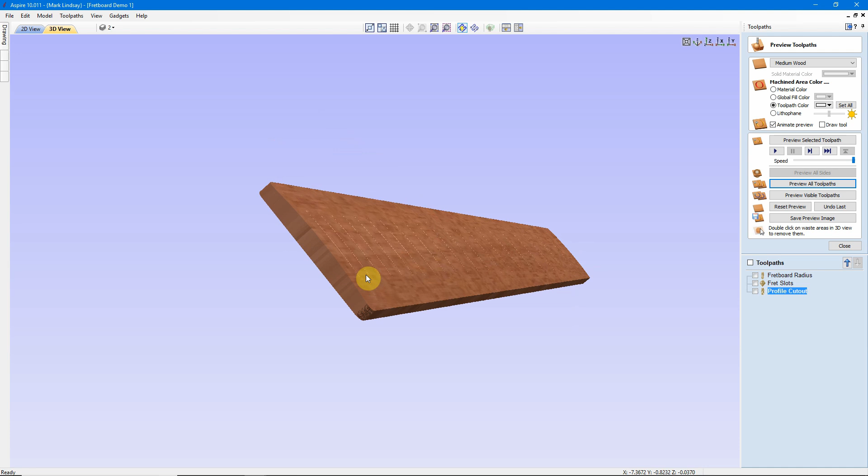Hey y'all! In this video I'm going to introduce the Moulding Toolpath, and I thought a good place to start would be on a simple project like this radiused guitar fretboard. Some of you may be thinking that's not a very simple project, but when it comes to the Moulding Toolpath, creating this radius on the top surface is a very simple project to do.

Now let me preface all of this by saying that I am not a luthier. I'm what you call a hack guitar builder. So if you're interested in lutherie and want to get into serious guitar building, I'll put some links in the description to a couple of message forums that I've found. I would recommend you join those forums, read threads on the guitar builds they're doing over there, and investigate further on your own. I am not an expert at this at all.

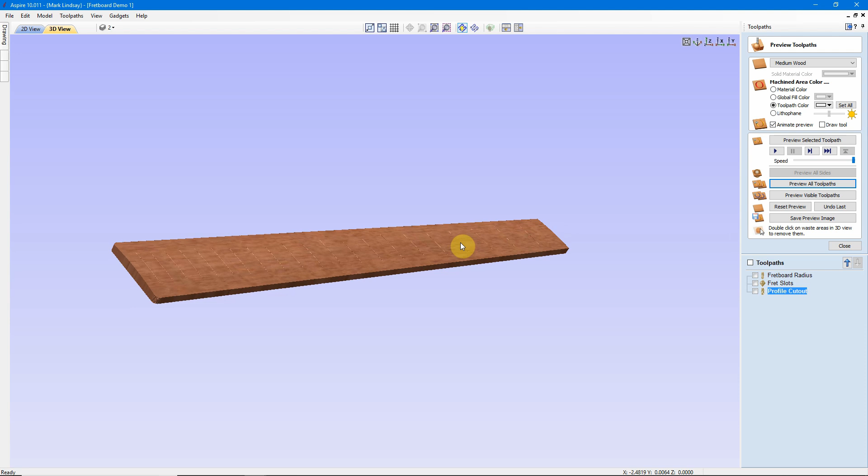Also, let me say that there are many ways of making fretboards. This is not the right way, it's not the wrong way, it's just the way I do it. So, with that in mind, we can go ahead and get going on it.

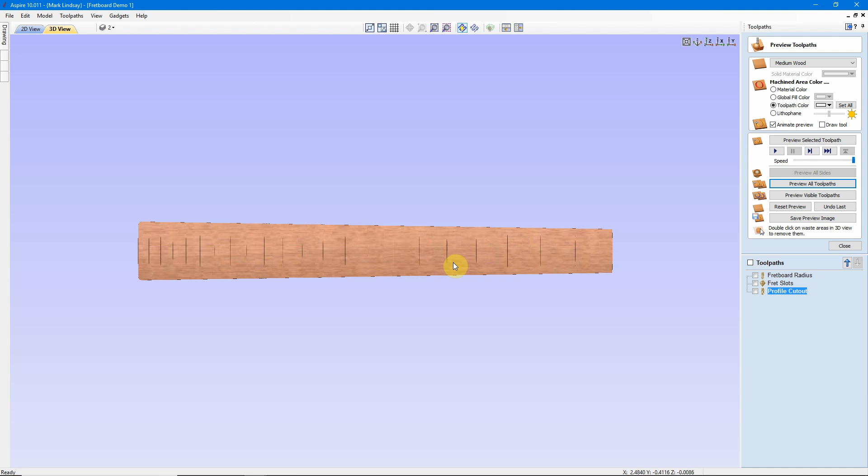Probably the hardest thing to do on any kind of fretboard build is to make the calculations needed to lay out the fret marks. The easiest way I have found is to use a website called FretFind 2D. FretFind 2D does use Flash, and I know a lot of people don't like Flash, but you can use it without Flash. It's just you won't be able to download the vectors we need to do our fretboard.

Without getting super technical into guitars or guitar building, you do need some information to lay out a fretboard. First of all, we're going to be working in inches. The main information you're going to need is your fundamental scale length. The scale length is the distance between the nut up here, where the strings cross over from the headstock and the tuners, from where the string last touches the nut down to where the string first touches the bridge. It's this distance between these two points that makes up your fundamental scale length.

You'll see it's already set for 25 inches. Most electric guitars are somewhere around the 25-inch range. Fender runs 25.5. Gibson, there's some controversy there - they're a shorter scale length. Most people these days, if they're making a Gibson style guitar, it's 24 5/8 of an inch. But most of your Stratocaster clones, etc., are somewhere around a 25-inch scale length. So that's what I'm going to use.

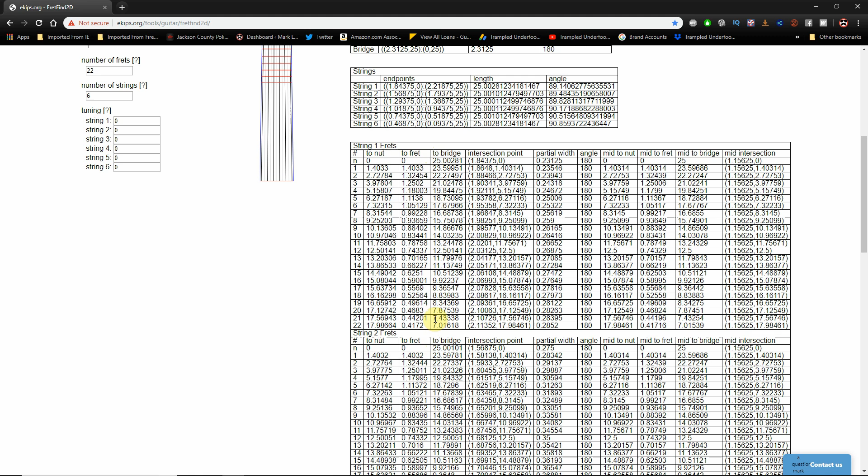Now if you don't activate Flash, you can come down here and take all these measurements and use those to calculate your fret positions. If you do activate Flash, allow, you'll see these buttons appear. Once I have all of my measurements over here, change that back to 22. Once I have all my measurements entered over here and I'm sure everything is correct, I can come right up here to this button. Save DXF file to disk.

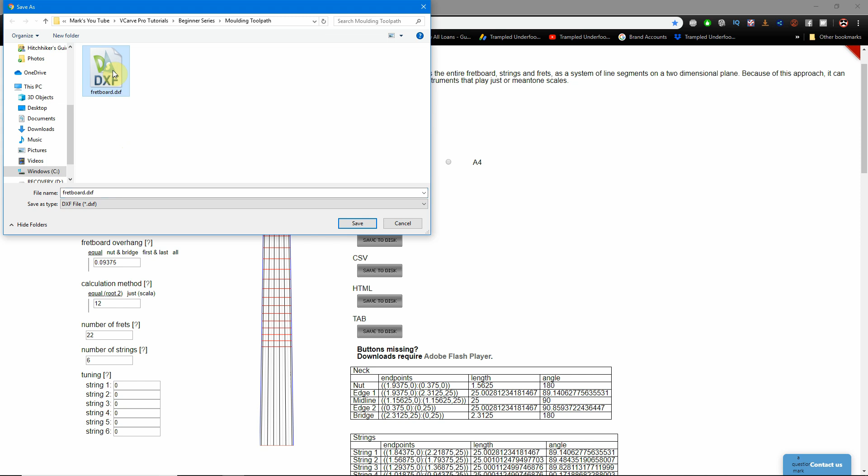And that's what I'm going to do. I'll navigate to the correct folder. I'm going to name it the same thing. I'm going to replace this file. Save. Yes. Now I'm finished with this website.

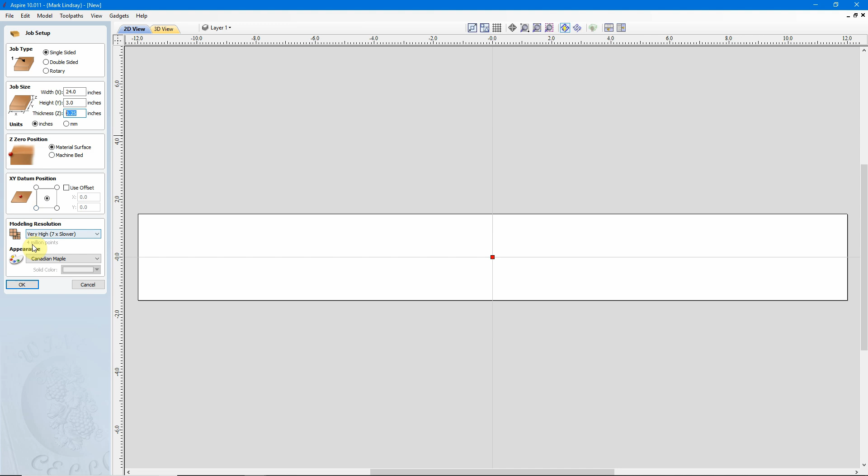So we'll get started with my blank piece of material. I'm going with a 24-inch width in X, a 3-inch height in Y, and my material thickness is 1/4 of an inch. I am using inches. I'm setting my Z0 at the material surface. For layout purposes, I'm going to set my XY datum position to the center. However, I will be changing that over to the bottom left, as that's where I set my XY0 outside on the CNC machine. And we'll go ahead and we'll accept those settings in our job setup.

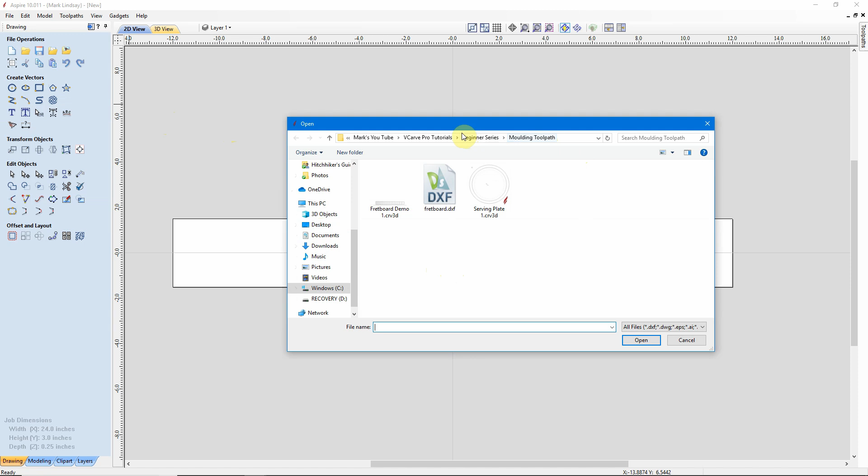Okay, now I'm going to need to import that DXF file. So I'll go up here to File, Import Vectors. Navigate to the folder I want to import from, and here is my fretboard. So I'll select that and open it. And that's the orientation that it saves the fretboard in.

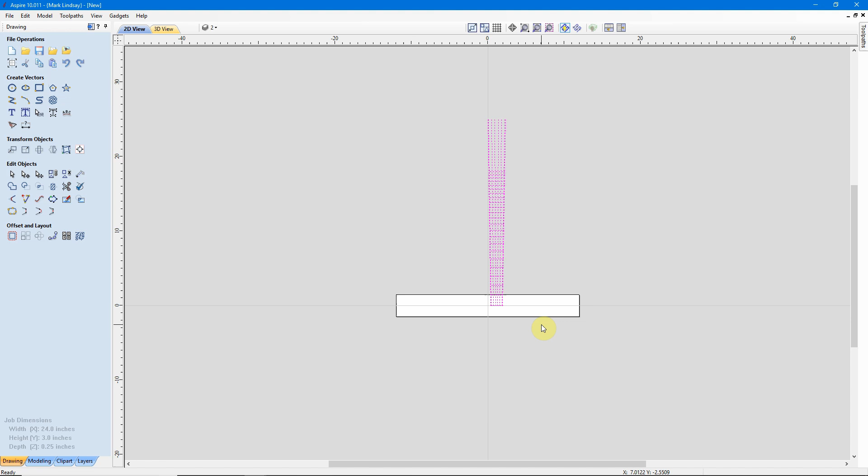So with everything selected already in pink, I'm just going to tap the number 9 on my keyboard. And you see it rotates it 45 degrees. I'll tap it again, and there we have rotated it 90 degrees. I can come over here and align it vertically and horizontally with the center of my material. And that brings it down here where we can see it.

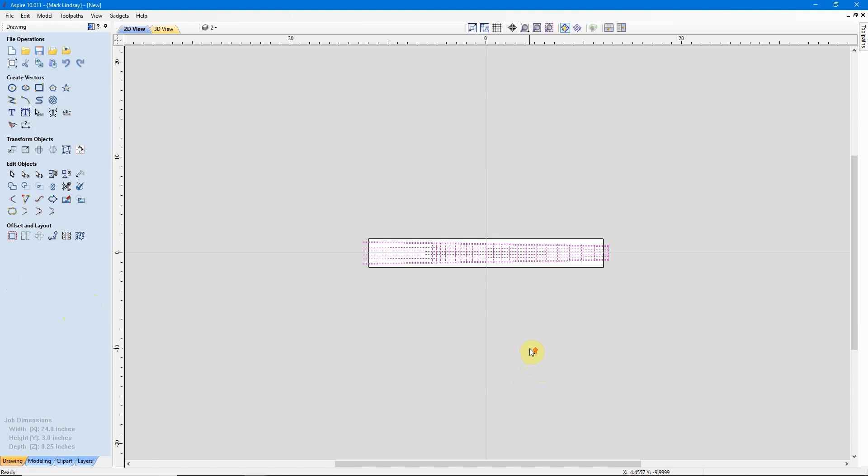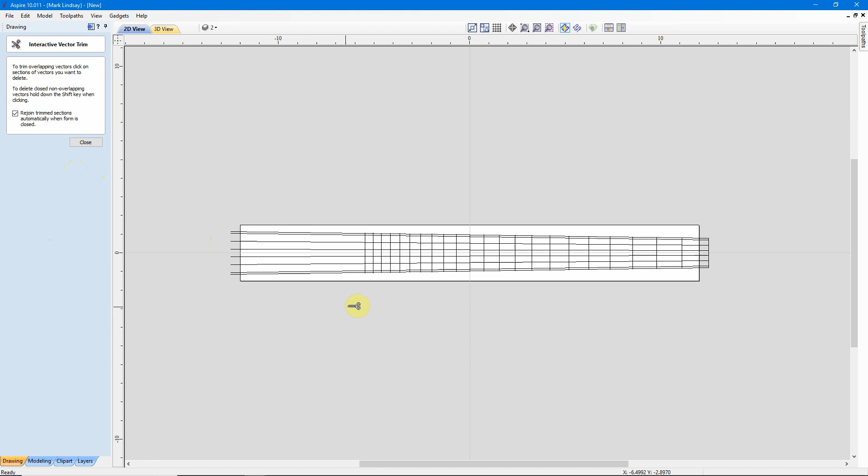Now you can see already that this is way too long. It's about 1 inch longer than the material is. If you remember when we were over in the website, I said that this measurement from this line right here down to the end here is from the nut to the bridge. Well, we're not interested in all of that. We need from the nut to this line right here. So I can click off to deselect, and I can grab my scissors, and I can trim away this outside vector here and this outside vector over here, then close.

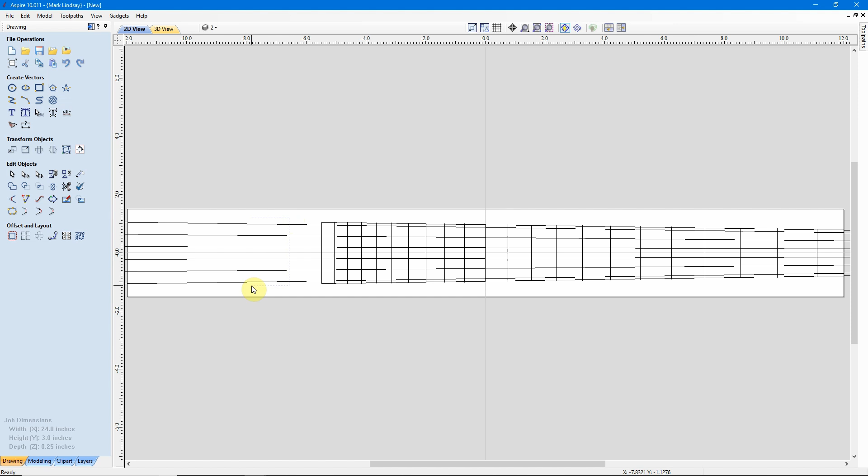Now the rest of these vectors here represent the guitar strings, and I don't need those for this drawing. So I can select all of those and just delete them. Now I have just my fretboard vectors that I'll be using.

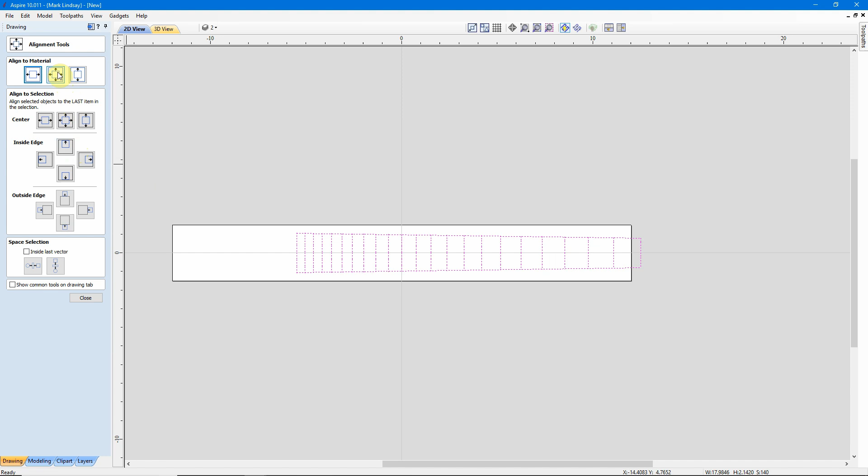So I need to center those on my material. So I'll select them all and align them vertically and horizontally with the center of my material. Then close. Because this was a DXF file, and knowing the way DXF files are created, we know that these are not joined vectors. Also, because of the way that website works, it can make multi-scale fretboards. All of these fret lines are separate segments.

So I will need to join these. So what I'll do is I'll select them all, then holding down Shift, I'll deselect these edges here. Then I want to join all these vectors. So I'll come over here to join.

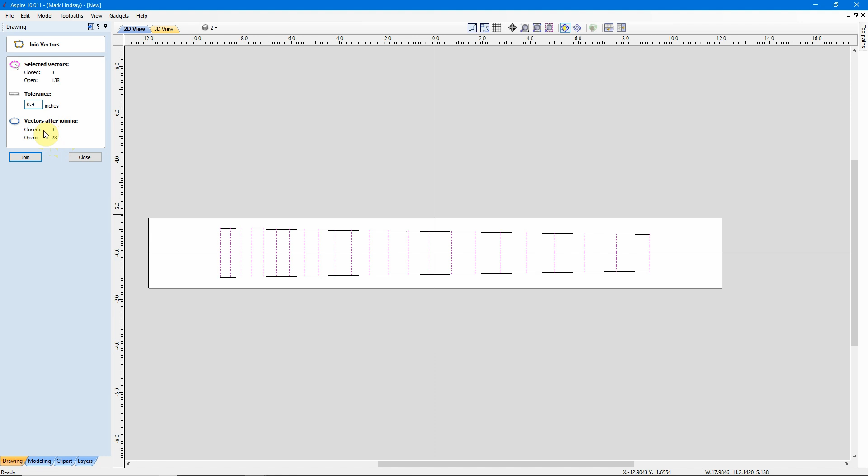So I'll backspace to get rid of a zero. Now it'll join some of them, but not all. Get rid of the other zero, and now I know it'll join all of these into solid vectors. So I'll click on Join and close that.

Now if I come over here and select one of these, it selects the entire vector. Those are no longer individual segments.

Now to create the outside profile of my fretboard, I'll need to join the two sides with the two ends. Before I can do that, let me grab my trim tool and zoom in a little bit, and you can see that these vectors overhang these edges just a little bit.

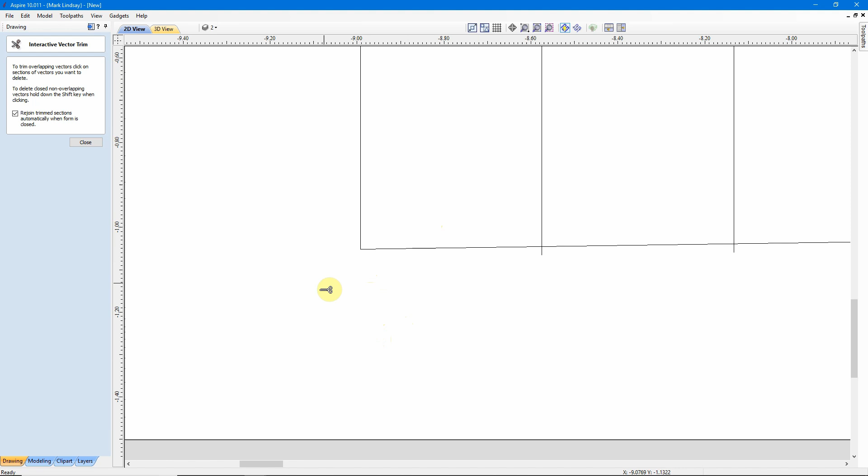I need to come up here and trim this one. Come back up and trim this one. Then go up to the other end and trim this one. Then trim this one. I can close that and zoom back out.

I don't need to trim the overhang on the fret markers themselves because I'm not going to be trying to join them to the sides. They're going to stay individual open vectors.

With that trimming done, I can now select that and it's joined automatically. So that's now one closed vector.

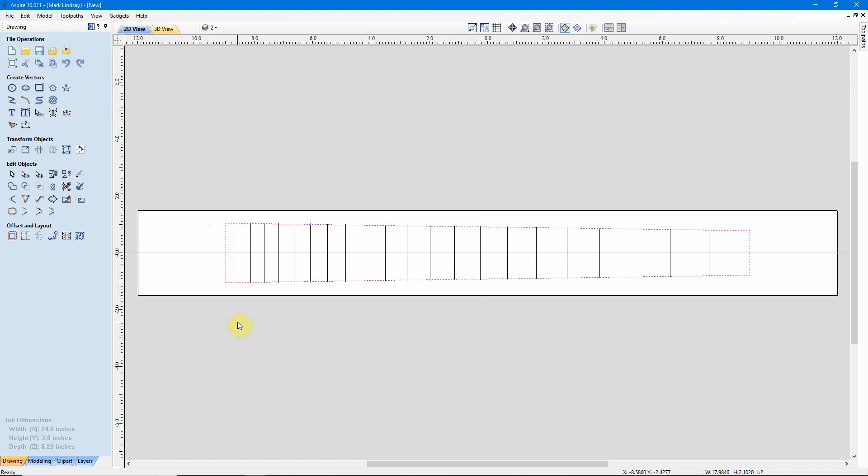Now this is something that's optional, but something I want to do. This is the end of my fretboard here, and I don't want this square 90-degree corner. So I'm going to come over here under Edit Objects to my Fillet tool. I want to put a 1/8 inch radius on these corners.

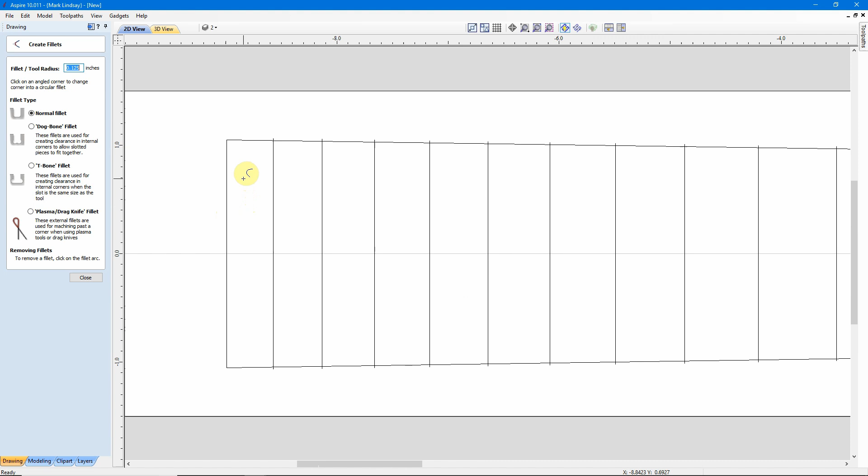I'll come up in here and you'll see how my cursor has changed to that fillet with the little plus sign. I zoom in and bring it up into the corner and you see a little check mark appears, telling me that this corner can be filleted. So I'll click. Come down here until I get the check mark, click, and I've rounded off my corners.

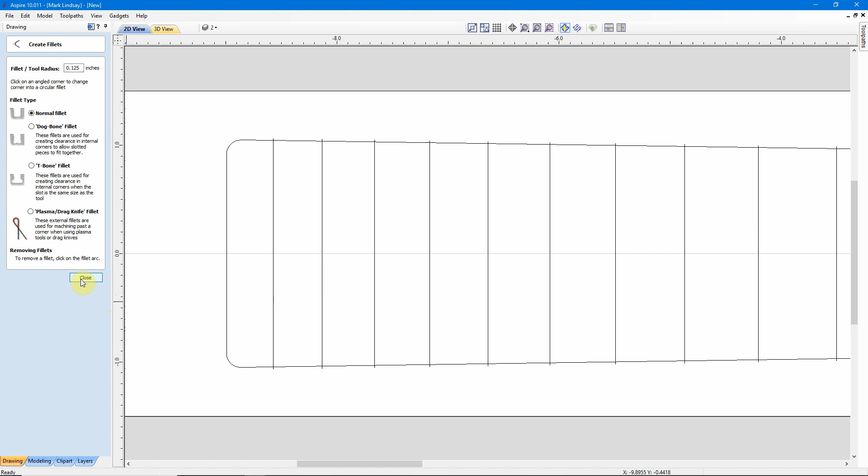Now I can close it, and there is the final shape of my fretboard. I could do some more sculpting, but for this demonstration I'm not going to worry about it. I do want to keep these nice square corners down here, because this is the type of fretboard where the nut is glued down to the neck right at this edge, flush with the edge of the fretboard.

Okay, now we'll get to the molding toolpath. To mold in this radius over the top of the material, it uses two vectors. I need a drive rail and I need a profile.

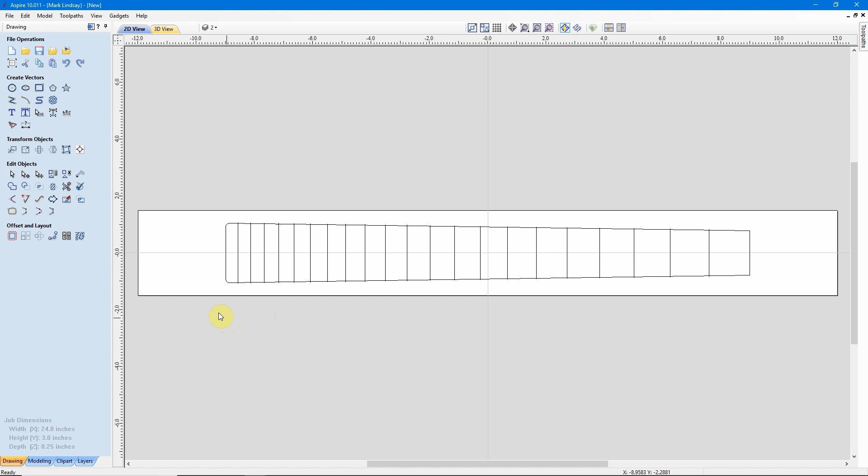The profile is the shape I'm going to mold into the top surface of this material. The drive rail tells the program which direction and how much of this material I want to project that profile down. We'll start with the easiest vector we'll need to draw, and that is just a straight line.

So I'll come up here to draw a line, polyline. I don't want to mold the entire top of this material. I want to be able to fasten it to my spoil board, and there's no sense in it running out here and machining away material I'm not going to be using for the fretboard.

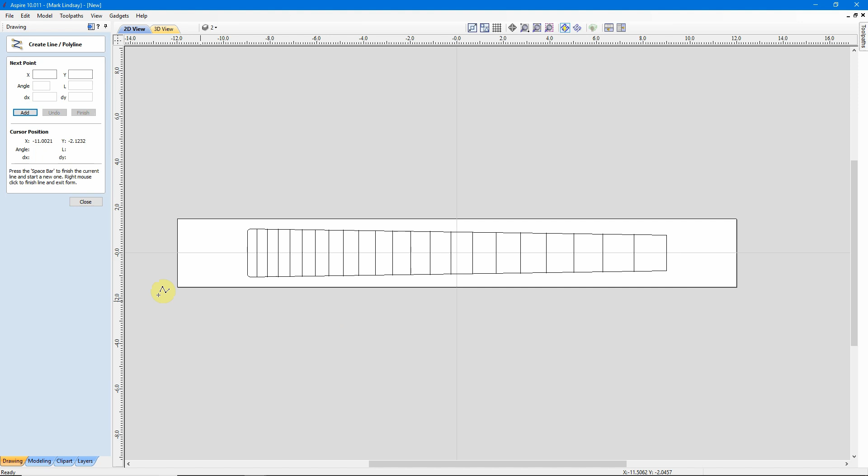So I'm going to come out here along this bottom edge of the material, roughly an inch away from the end of the fretboard, and click to start my vector. I'll come out to about an inch away from the other end of the fretboard, still on that bottom edge, and click again to end my line. Then I'll hit the space bar to end that line.

Now you can't see it because it's right on the edge of the material, but if I were to draw a box, you can see how that drive rail lines up with the bottom edge of the material.

We're going to use this vector to tell Aspire or VCarve that this is the line we want our profile to follow. So let me click off to deselect that, and now we'll draw our profile.

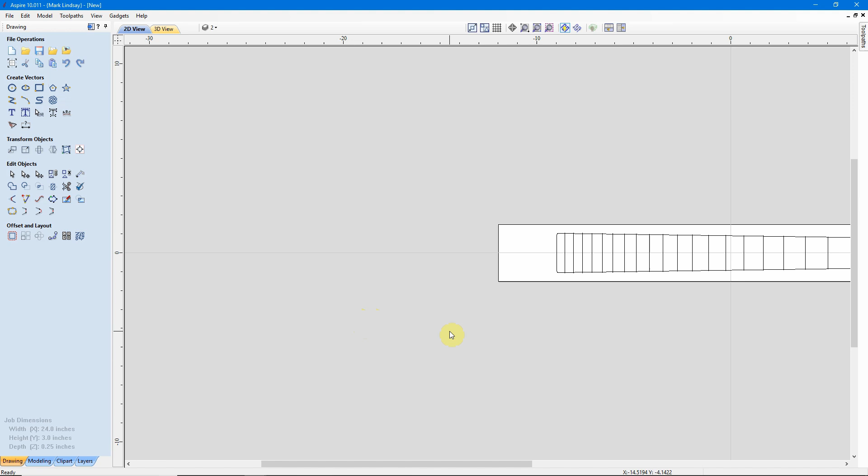The profile is going to be a simple profile. I'm going to radius this fretboard, and there are several common radius measurements people use. Most common is 9-inch, 12-inch, or 16-inch, depending upon how flat or how rounded you want that fretboard.

I'm going to go with a 9-inch radius. That is typical of most electric guitars.

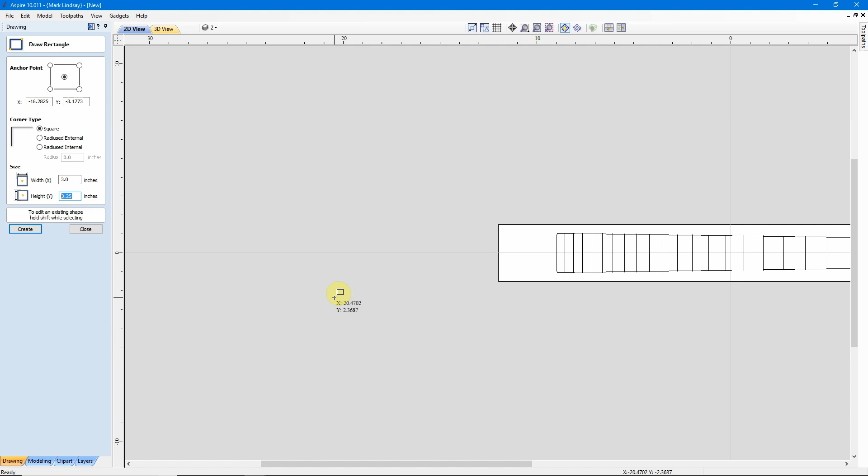To do that, first we want to make a rectangle that's the same width as our material in Y, and the same thickness as our material. I'll go draw a rectangle, and since I've already set this before, the width is already set at 3 inches, and the height is already set at 1/4 inch. Now I can just come out here somewhere away from the material, bring it down here to make it easier to maneuver, and click. Then I'll close, and that draws me a rectangle that is 3 inches wide, the same as my material here, and 1/4 inch tall, the same as my material thickness.

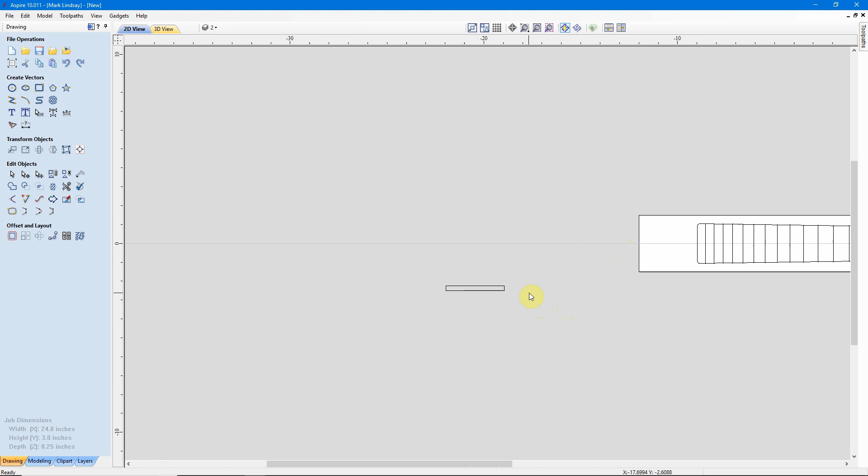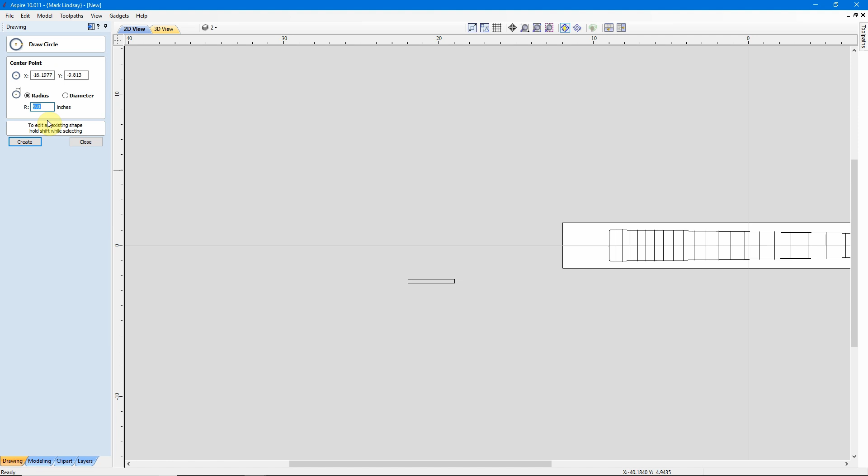Now I want a 9-inch radius up here on this rectangle, and the easiest way to do that is to create a circle. Make sure my radio knob is over here in radius, and the radius of the circle I'm going to draw is 9 inches. I'll come down here and just click. Now I can close this.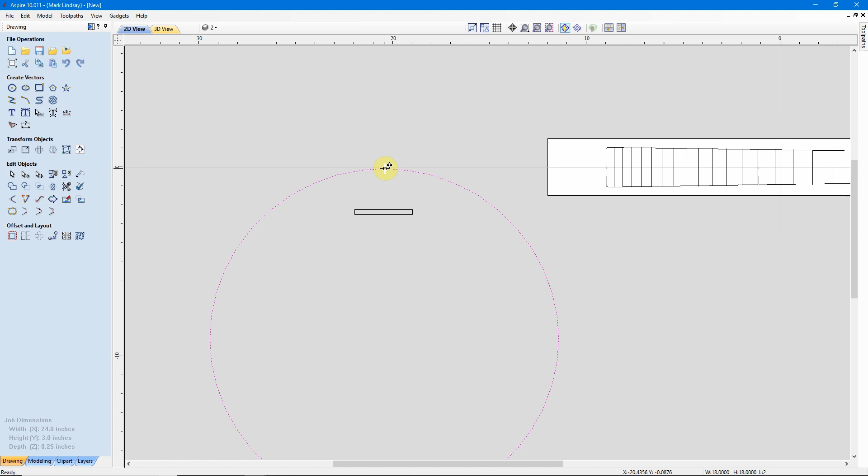Now I want to move this circle down and align it so that the center up here, the top of this circle in the center, is matched up with the center of this rectangle. Because I have smart snapping enabled, I can just come up here and you'll see how my cursor changes to that crosshairs with the 4-way arrow. I can just click and hold, drag it down to where that is touching the top line, and it just snapped right onto the top line of that rectangle.

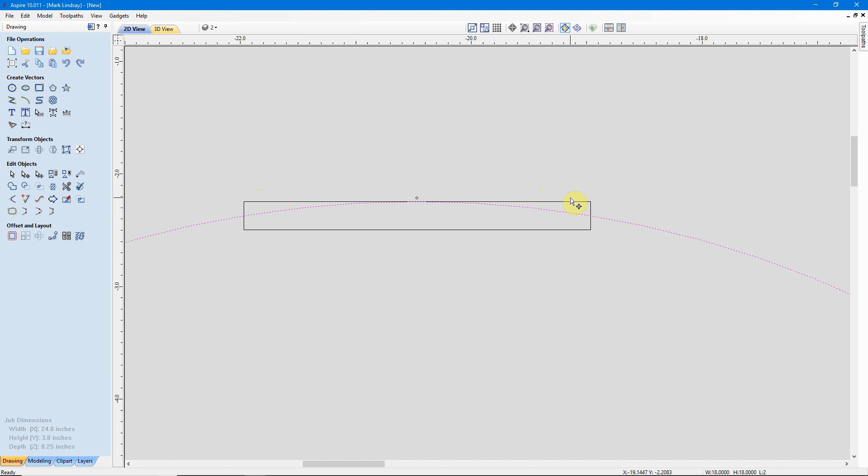Then I can grab it again, click, and drag it over, and we'll get it to snap. You see how that cursor changes? It now indicates a center mark. And I can let go, and now the center of that circle, the center of this edge of the circle, is in the center of this rectangle. Click off, and I have the circle overlapping this rectangle, and the center marks of each vector are lined up right here.

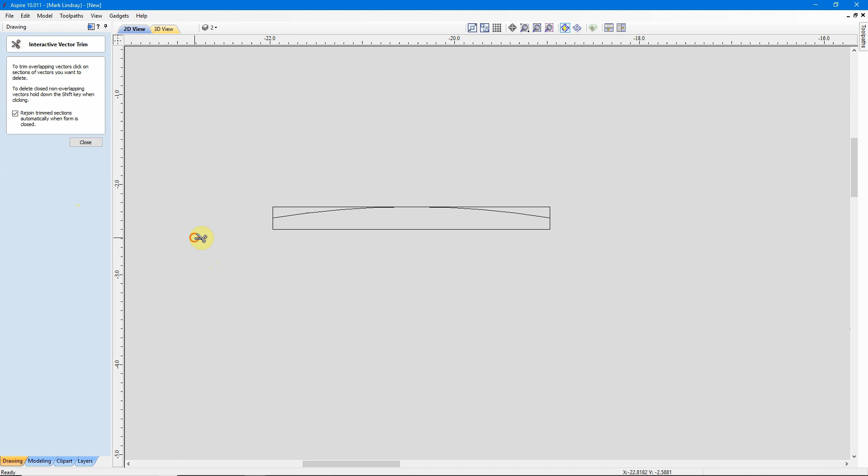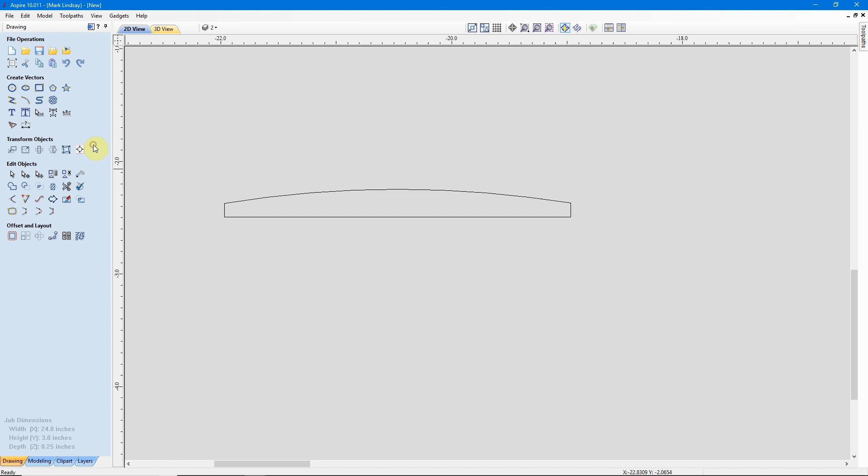Now I can start trimming to make the profile. So I'll grab my trim tool. The first thing I'll do is get rid of the rest of this circle because I don't need it. Then I can come up here and trim away that corner of the rectangle and that corner of the rectangle. I can now close the trim tool, and because I have a check mark here in Rejoin Trimmed Sections, when I close this, it has automatically closed this vector.

Okay, there's one more thing I need to do to make this a profile I can use with the Moulding Toolpath. That is, I'll need to eliminate this vector down here on the bottom.

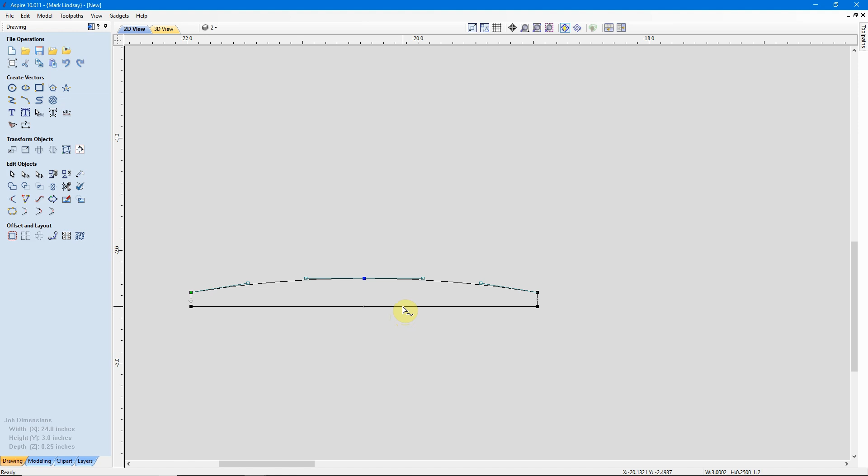So I'll go into Node Editing mode by typing the letter N on my keyboard, then bring my cursor right up here over this vector, and you see how that little tilde appears underneath the arrowhead. I'll right-click, delete span, and that removes that vector down below. Now I can click off to deselect, right-click to come out of Node Editing.

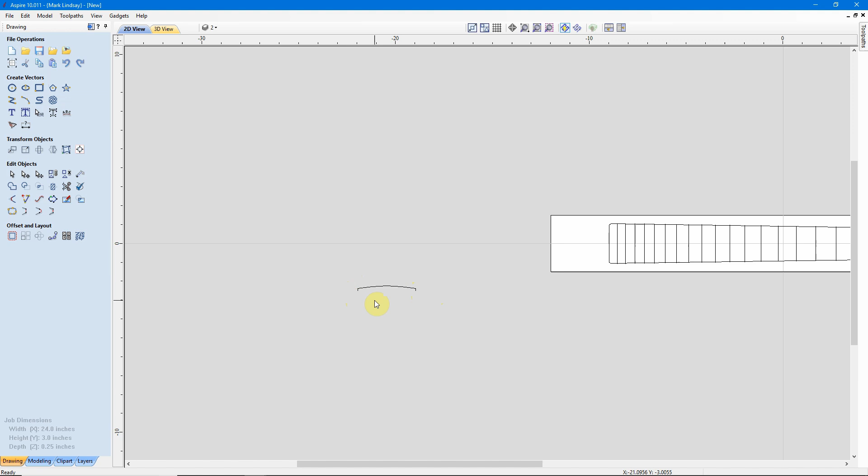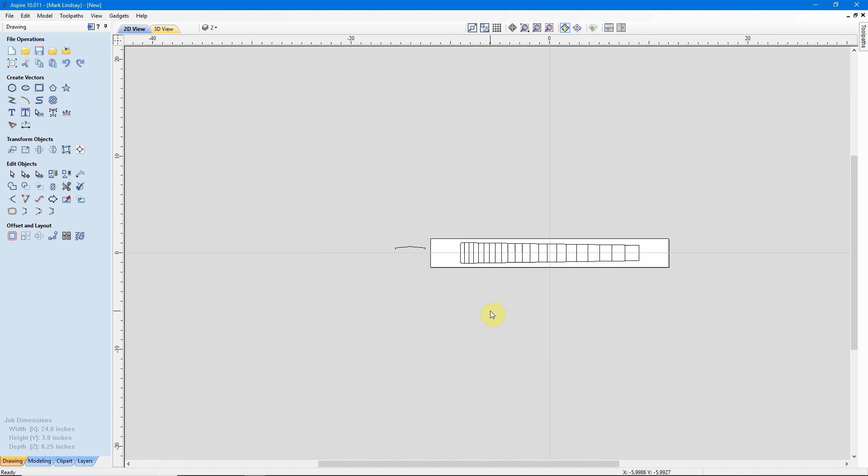Then there is our profile that we're going to use along with that drive rail to radius the top of this fretboard. So let me go ahead and select it, click it again to go into Move and Transform mode, and bring it up here a little bit closer so I don't have to hunt around to try to find it. And I'll zoom in.

Believe it or not, we're already ready to calculate the toolpaths needed to cut this fretboard. It's that simple, as I said.

So we'll go over here to the Toolpaths tab, and the first thing I want to do is radius this fretboard. So I will select that drive rail and hold down Shift, select the profile. The drive rail first. You can use more than one drive rail if you should need to, but always select the profile that you're going to drive along this rail. Select that profile last. We'll go over here to the Moulding Toolpath.

And the Moulding Toolpath up here in this paragraph will remind you to do this: select the drive rails for the toolpath, followed by the profile you wish to extrude. You can use multiple rails. The last selected vector is the profile. So when we opened up the Moulding Toolpath, we see that our drive rail turned orange and has these little arrows here.

And so did our profile. It turned orange and has the little orange letters. It also shows the start point for both the drive rail and the profile. But you notice these red projections down here. These red projections are showing us that it's going to extrude this profile out here.

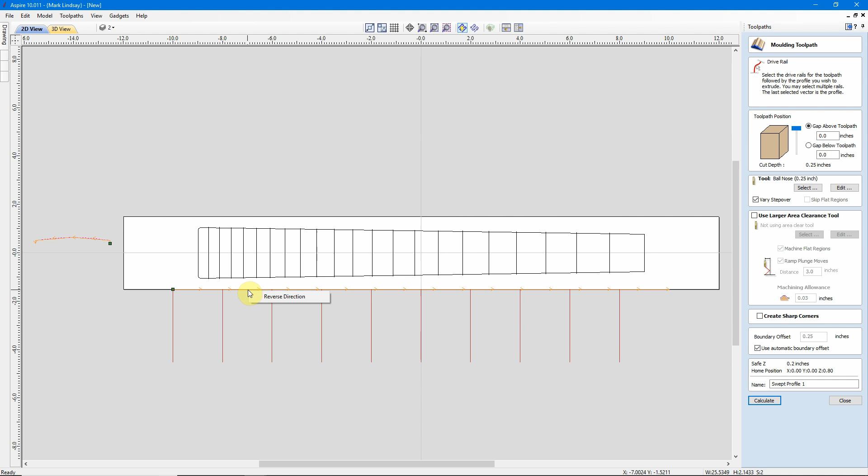Well, we don't want it to do that. We want it to extrude back up here in this direction. So to change this, we'll put our cursor over the drive rail and right-click, then select Reverse Direction. It has now corrected itself to where our profile is going to be extruded this way across our material.

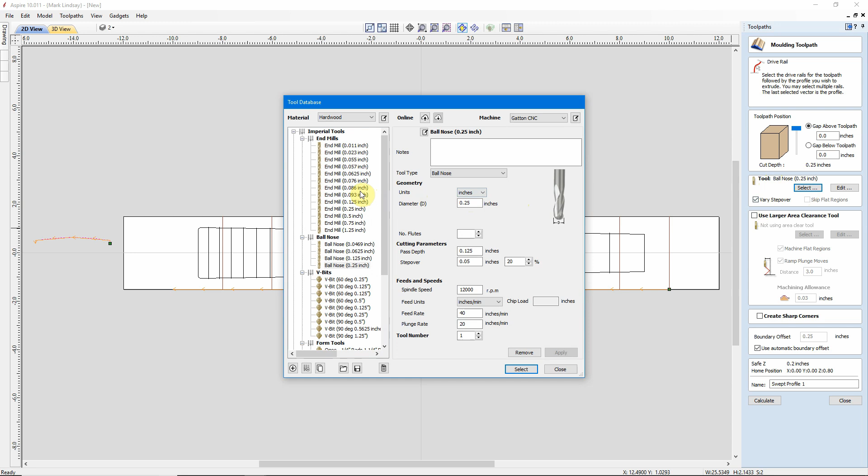So now we can move over here to the next section. Gap above our toolpath. We don't have a gap above our toolpath. We want it to start carving from the surface. So now we'll choose a tool. I'm going to use a 1/4 inch ball nose. Select that. Then I'm immediately going to edit it because I want to bring my step over down, but only for this toolpath.

If I were to change this step over when I selected it, it would save this setting, and every time I selected this bit, that changed step over would be the default. I don't want to do that. I'm going to bring this down to about 8%. I want a real small step over so I get a fairly smooth finish. There will still be some sanding involved, but I'd like to have the smoothest finish I can get.

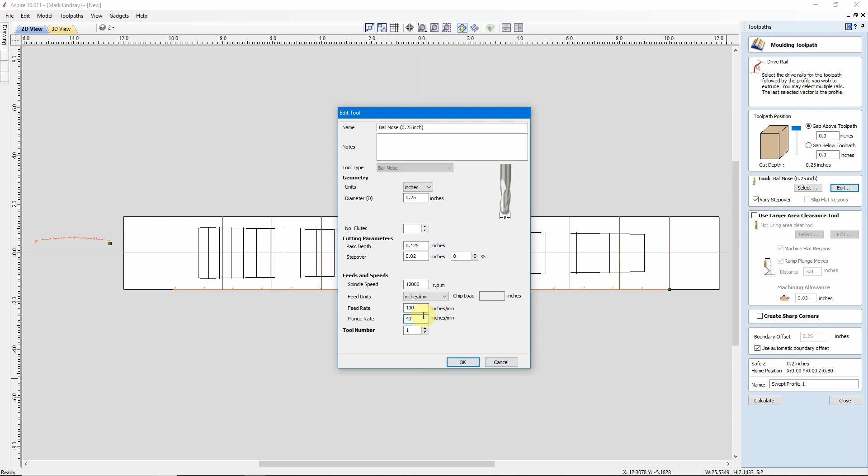A boundary offset: if I was carving within the edges of my material and I needed to make certain that the tip of that bit went past the edge of my material, I could enter a boundary offset equal to the diameter of the bit that would bring the tip of that bit out past the edge of the material, 1/4 inch, just to make sure that this entire edge got machined.

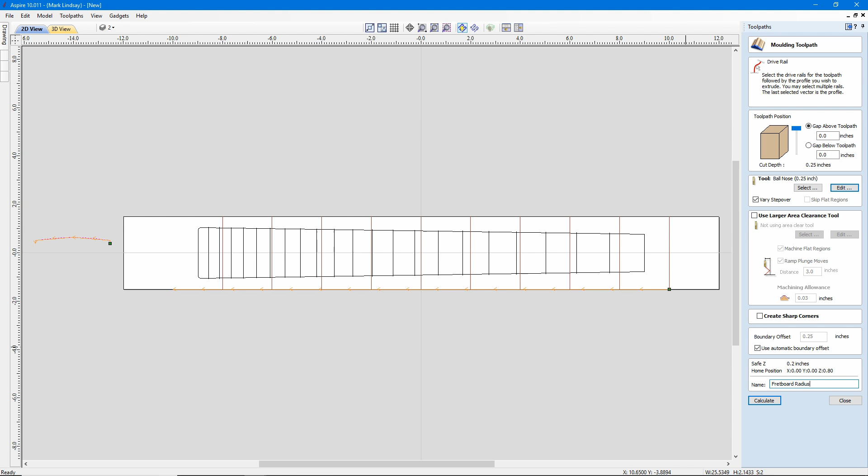I don't need to worry about that because I will be cutting out the outside profile of this. So if the tip of the bit only gets up to here, I'm fine with that. I'll be cutting this out. I am going to change the name of this toolpath to Fretboard Radius, and we'll calculate that toolpath.

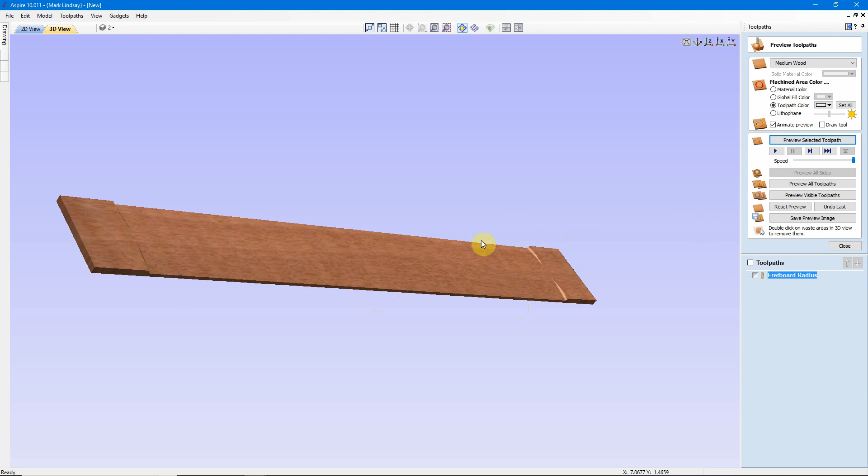There's our toolpath calculated. I'll go ahead and preview it, and we see the bit is going to start low here, come up to almost the surface of the material, and then start back down the other side, giving us a nice radius carved into the top of the fretboard. Go back to a straight Z view, close my preview window, come back over to the 2D view.

Now the way I cut fret slots for the fret wire, I still cut my fret slots by hand. So all I'm going to do is use a 30-degree V-bit to score a line in the top of the fretboard right here in the center, so I have an indication of where I need to line up my fret saw in my fretting jig and cut those fret slots. So I'll select all of these fret markers and I'll do a profile toolpath.

I want my cut depth to be about 20 thousandths, so 0.02. I don't want it to cut very deep at all, but deep enough for me to see those lines after I get finished sanding down that fretboard. I don't want to sand away my markers here. I want to machine on the vector. I'll catch that before I forget it.

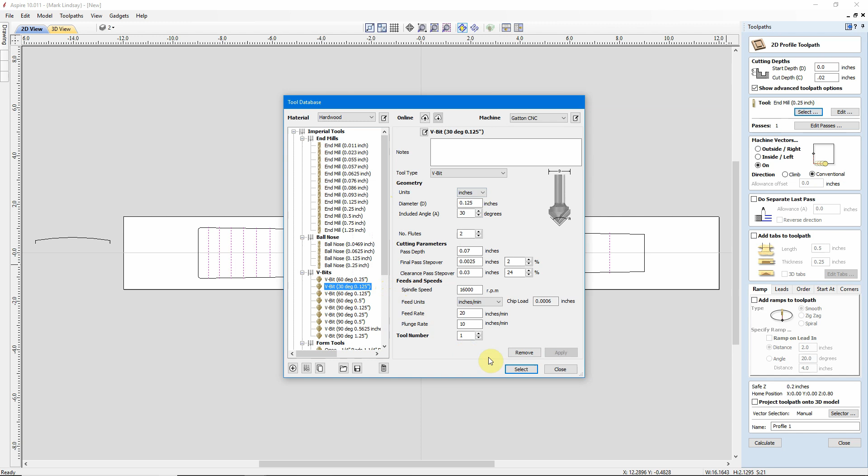Now I need to select my bit. I'm going to use a 1/8 inch diameter 30-degree V-bit. Give me a real fine line. So I'll select that. Again, I want to make sure I'm machining on the vector, and I don't want to make any changes down here.

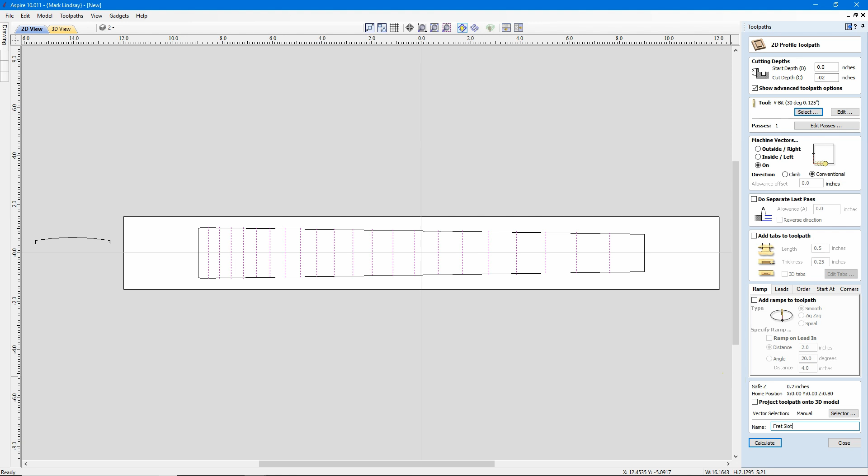Name this fret slot and calculate that toolpath. Then we'll preview that, and there we go. Now I know it looks like it didn't cut them all, but as you zoom in, it's just simply the way the preview is shaded. When you zoom in, you can see those little fret marks.

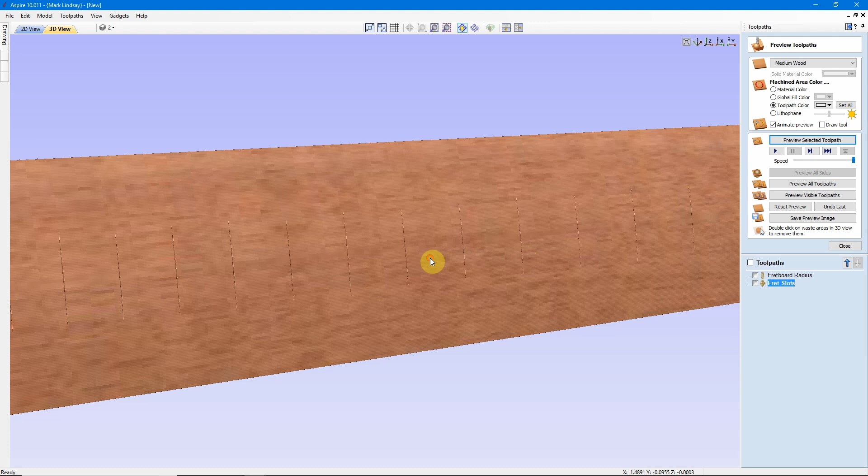Again, I cut with a hand saw. I prefer to do it by hand, and this just gives me an index line where I can set up my fretting jig and cut these fret slots with my fretting saw. So we'll close our preview.

And now all that's left is my profile cutout. And again, I'll select the vector I'm going to cut out, go up to a profile toolpath. This time I want to cut all the way through the material, so for my cut depth, I'll type in Z plus 0.005 because I want it to cut about 5 thousandths through the material to make sure I cut all the way through, and tap equals.

To cut out the tool, I'm going to use a 1/4 inch end mill, and I'm going to machine to the outside of those vectors. I do want to do a separate last pass with an allowance of 0.01. I'm not going to add tabs. This is a perfect candidate for my masking tape and CA glue method of mounting it to the spoil board. I am, however, going to ramp in my plunge moves using a smooth ramp over a distance of about 2 inches.

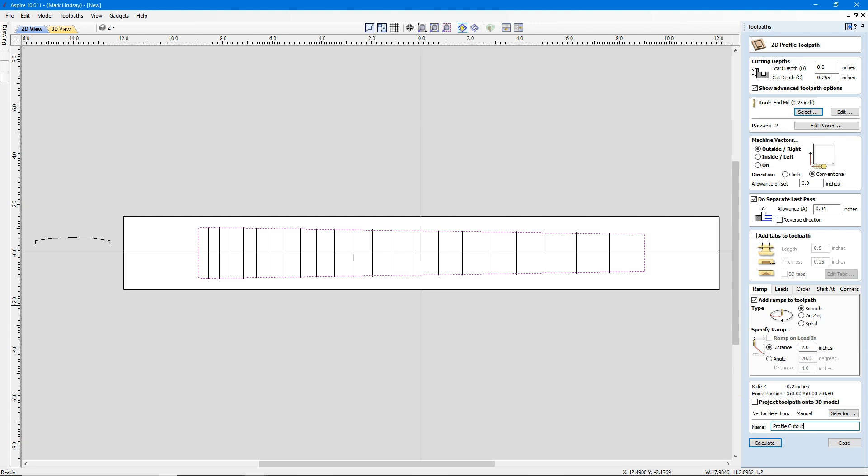I can change this to profile cutout. We'll calculate that toolpath. I'm getting the warning that it's going to cut through the material. I want it to. Then we'll preview that toolpath. And there we go. Double click to remove the waste material. And there's our fretboard.

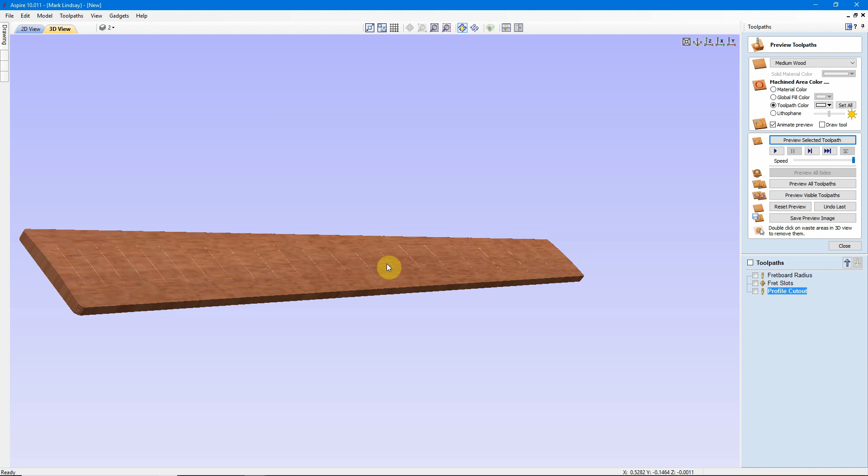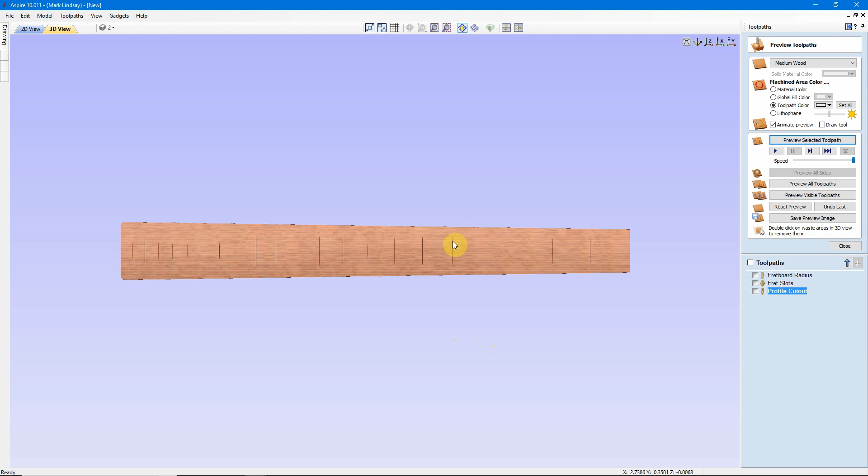We have a nice radius. There will still be some sanding involved. And again, that's why I cut my fret indicators 20 thousandths deep, so I can sand this and not sand away my fret marks here. Now, some of you may be asking why I don't just go ahead and machine those as fret slots. With Aspire, I can do that because I have 3D modeling capability. With VCarve Desktop and VCarve Pro, these lines will not cut deep enough to cut fret slots.

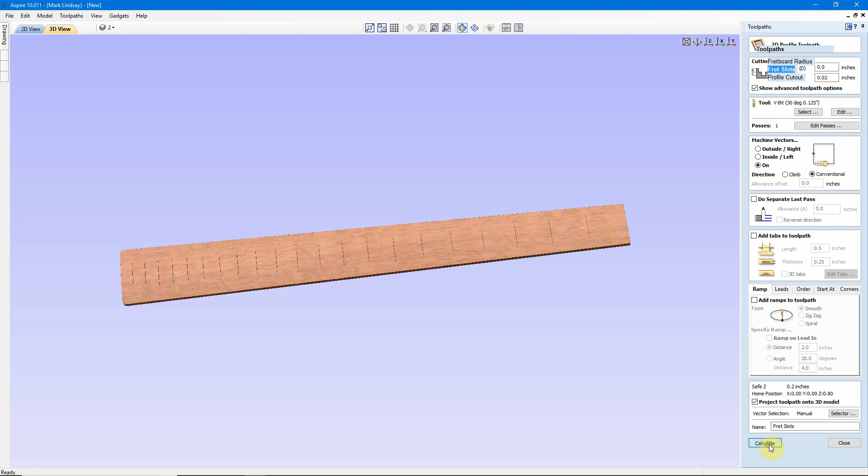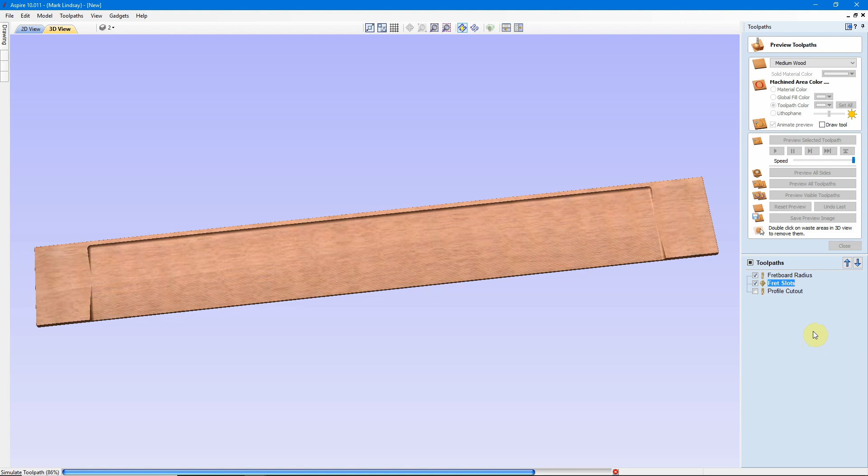Now, let me go back into our fret slots toolpath here. And some of you may be wondering why I don't select Project Toolpath onto 3D Model. Well, I will. Then we'll recalculate. And I'll reset my preview, and I'll run these two toolpaths, preview visible toolpaths. There we are, cutting the radius. And then there we go, cutting those fret marks. They still don't project down.

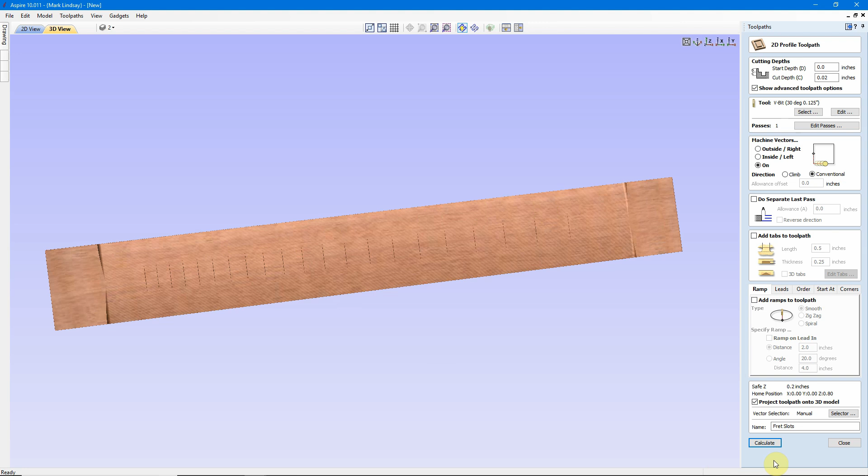The Moulding Toolpath is not considered a 3D toolpath. So this is not a 3D model. So VCarve, and in my case Aspire, even though I selected project it down onto 3D model, the software says there's no model here to project it down onto. So, we'll close this without changing it. Go back to a straight Z view.

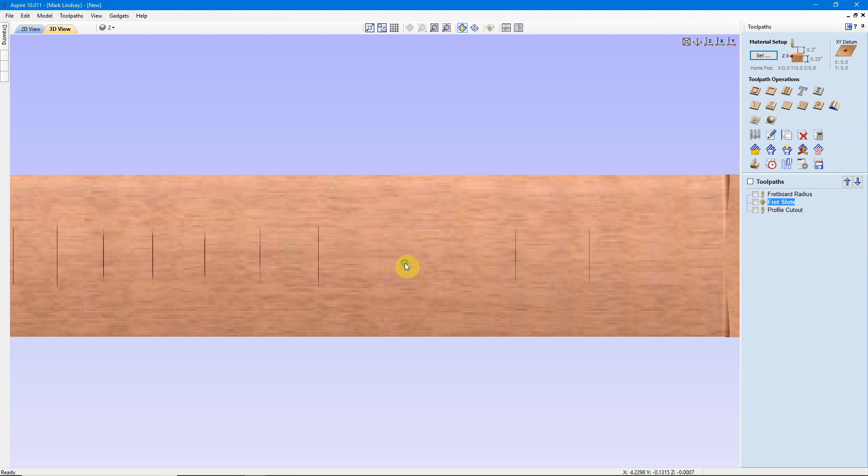So, what I would need to do in VCarve Desktop or VCarve Pro is I would need to somehow model this radiused fretboard in another program, then import it into VCarve in order to get these fret slots. This is one of the reasons why I prefer to just make those little markers and then come in with my fret saw and cut those fret slots myself. That's the important point to take away from this. The Moulding Toolpath is not considered a 3D model. It's a 2.5 dimensional carving.

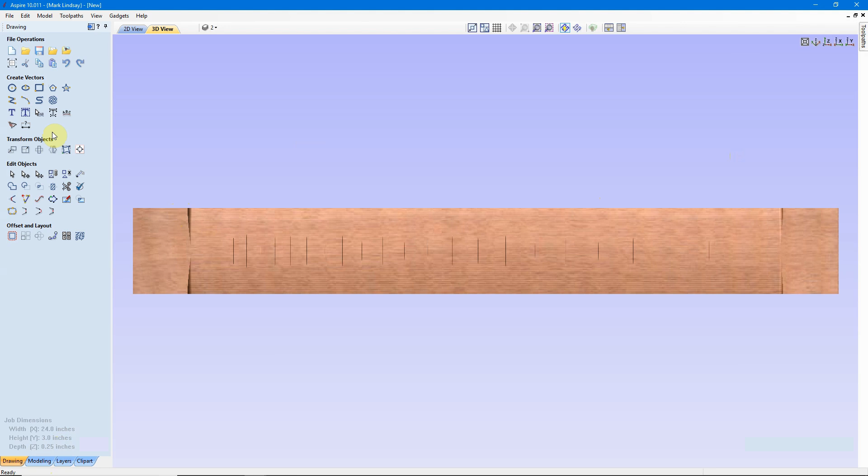If I were to go back over to my drawing tab rather, go into my modeling tab, there is nothing there. We'll go ahead and end it here. I hope you got something out of this video.